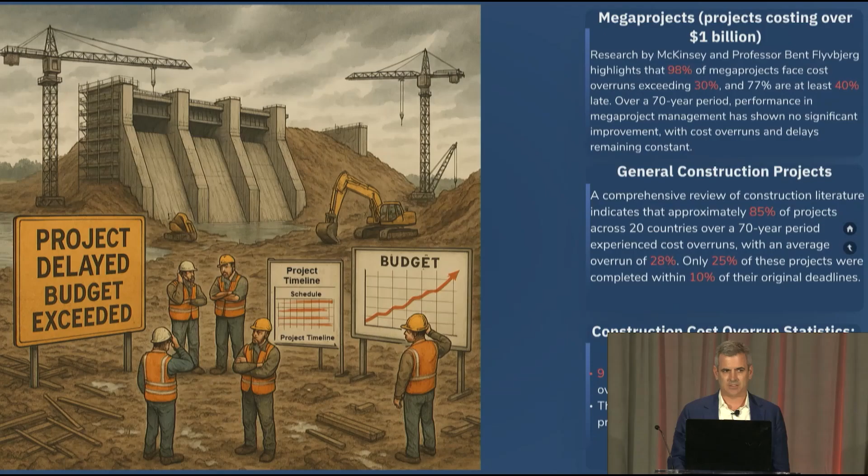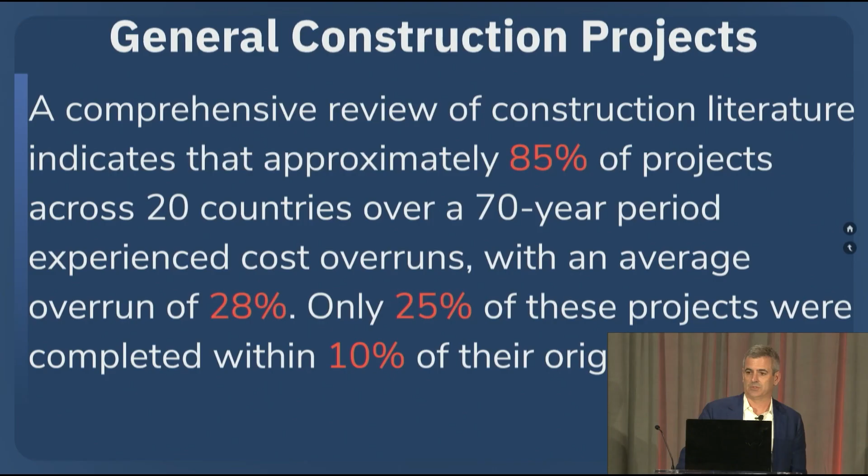So we have a major problem, probably not just in the United States, but the world, and that is our construction, engineering and construction projects are going way over budget, and they're taking way too long to build. The interesting part is the larger the project, the more it's going to cost, and the less you would like to go over in terms of percent, in terms of cost and time.

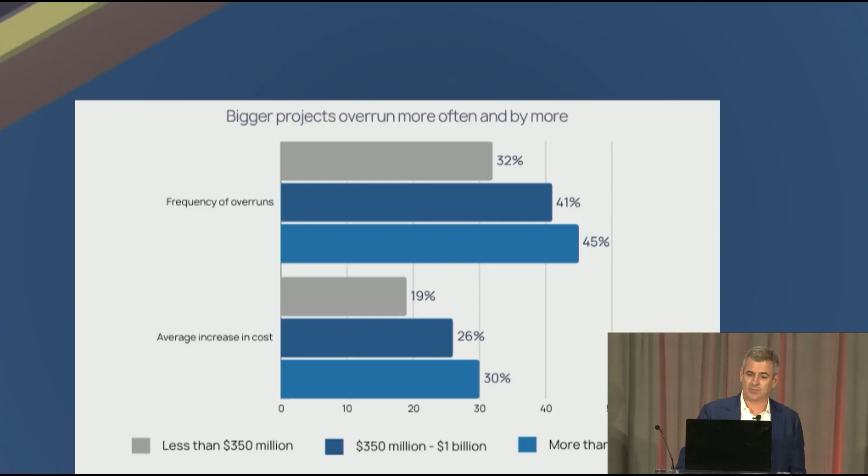But it turns out, and these are some of the key factors I'm showing you guys here, the bigger the program, when you get over $1 billion, the more percent we have in overruns, and the longer it takes. So you don't want to have a larger percentage on a $1 billion project, right? Because that's going to cost a lot.

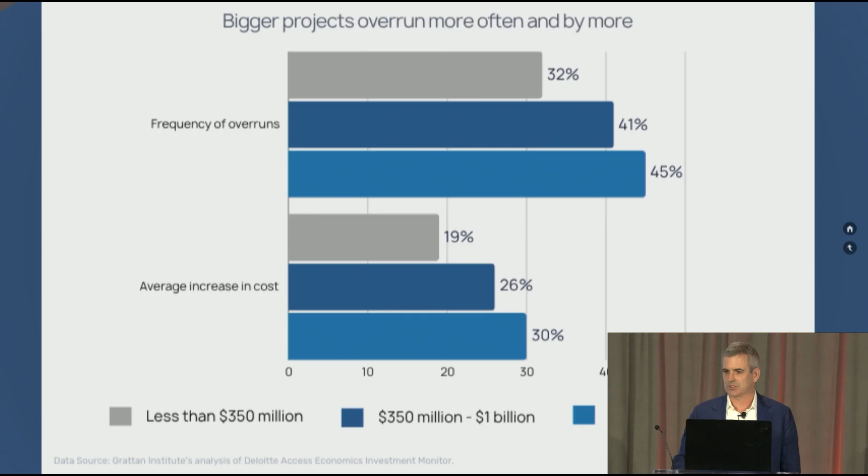So why is that? Why are we in a place in the industry where we're wasting so much money in engineering and construction? It's because these projects are so complex, and there's no chance of them getting any less complex than they are right now.

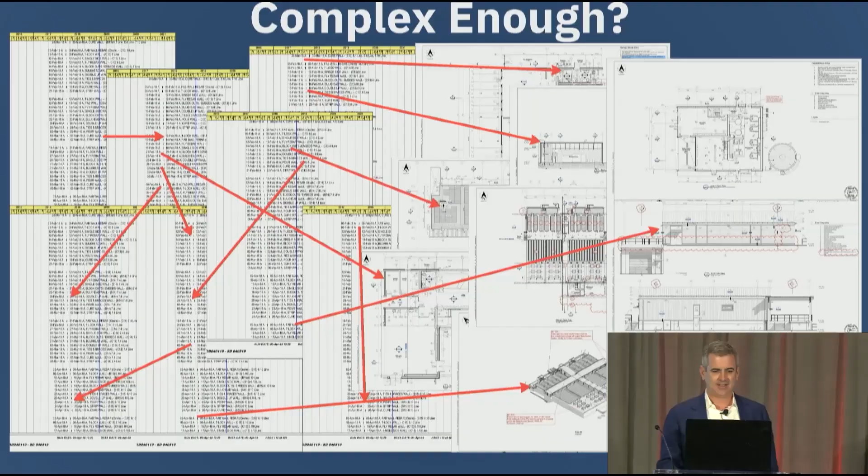And that's because what we're trying to do is connect all the dots between all of the planning of how we're going to build it, how much it's going to cost to build it, then we're trying to tie that into a 2D model. We're trying to say, have we forgotten any scope? Have we figured it all out? It's just too complex.

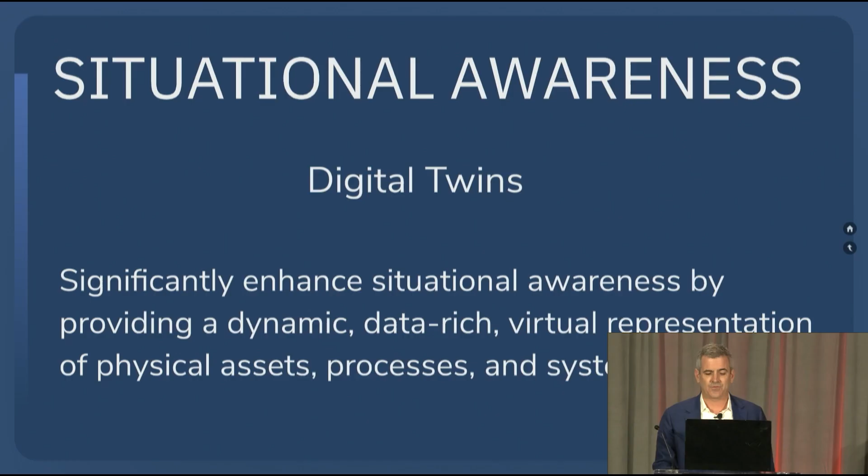So what we're lacking, and one of the key reasons we're failing in the industry, is we are lacking in situational awareness. On all the programs I've been on, it's never been the case that the people on the programs are not brilliant, because they are. They are the most brilliant people I've ever met. It's just they don't have the information at their hands to have proactive decision making. It's all reactive decision making.

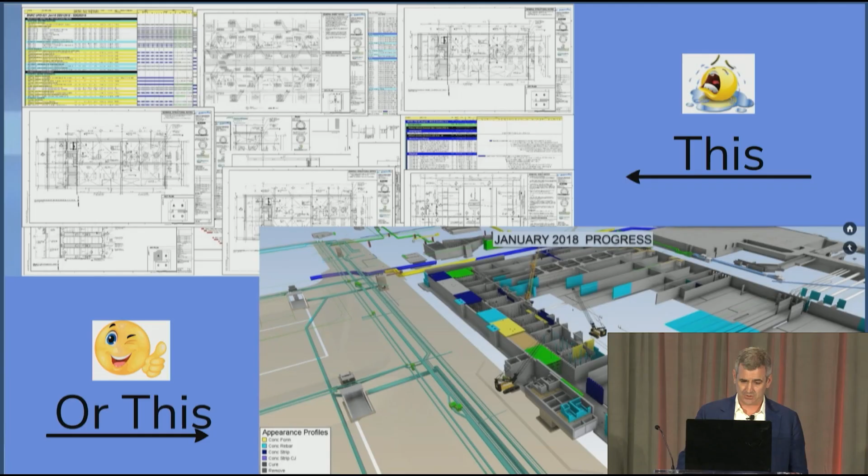So that's what it used to be. That's why I'm putting that very sad face there, because we're trying to blend it all together. But what we do now is we have our digital twin where everything is combined into visualizing it. And by doing that, that's when we start saving money and time.

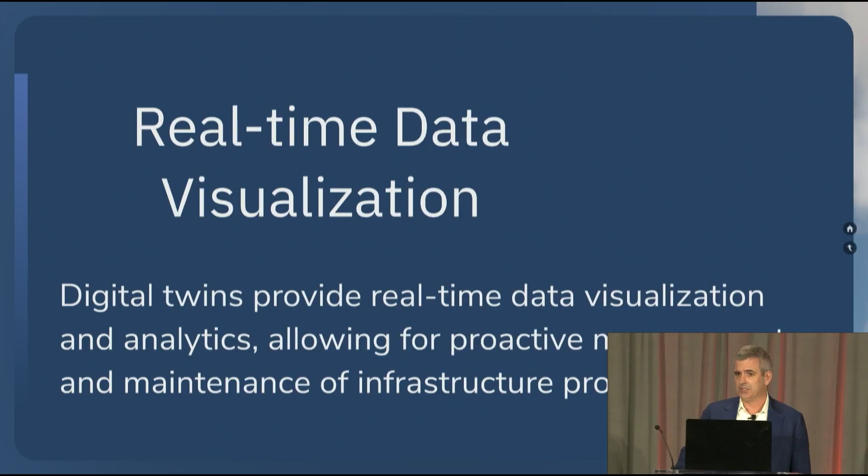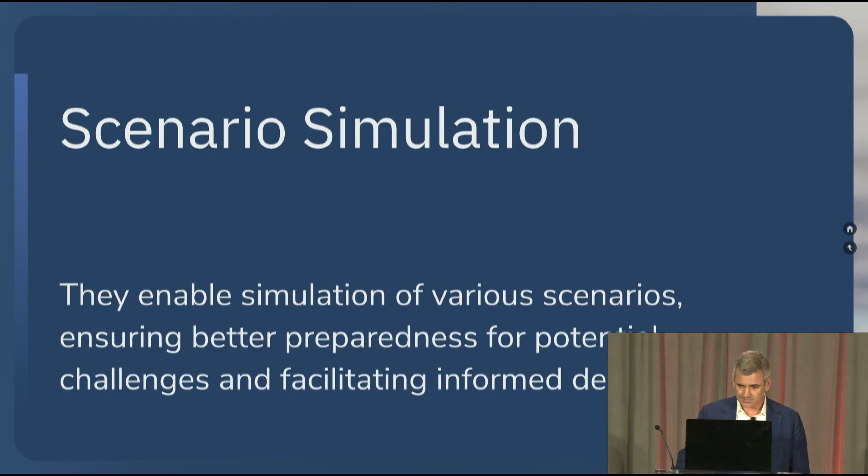So we're trying to get that data in real time so that we could start making decisions. We're trying to allow contractors to rehearse — digital rehearsals is what we call them. With their digital rehearsals, they can actually test it, practice before they play, before they go out in the field. And we're also enhancing the collaboration.

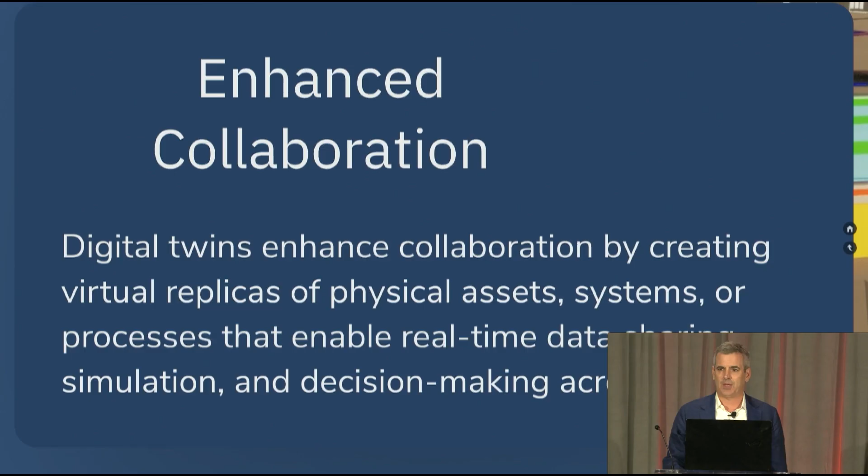Even on greenfield projects, I've found that they're incredibly complex. There's still people that we are impacting. There's still the community that we have to talk to. And everybody really needs to get on the same page so we know what we're building. And the programs we work on are billion-dollar programs, many billion-dollar programs.

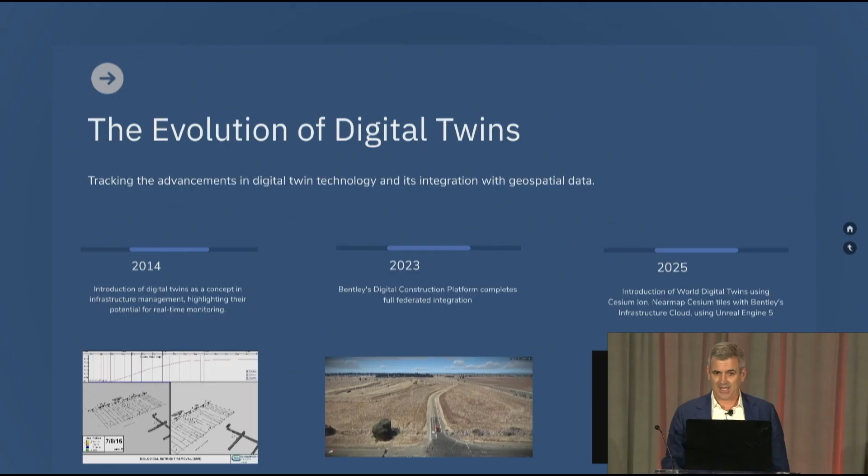So how did we get to the point where we are today, where I'm able to be here with you guys? Well, it starts with kind of like the Atari age, or Sega Genesis, if you will. Back in 2014, we had to prove this concept on a $2.1 billion program. And this is what it looked like.

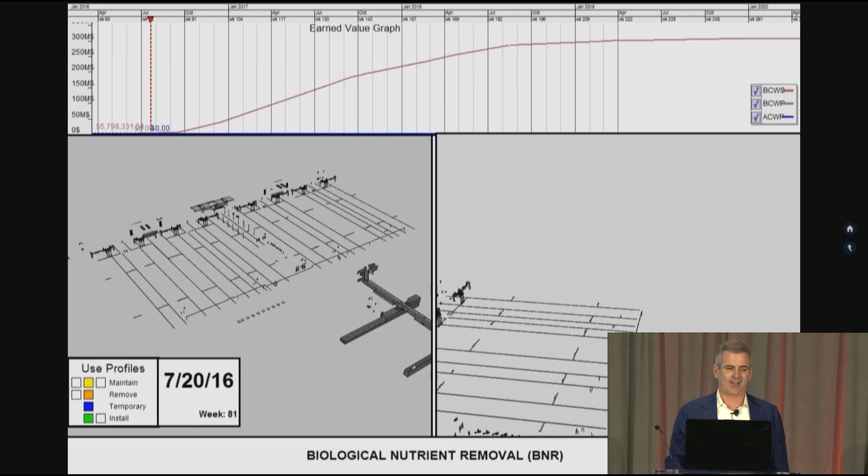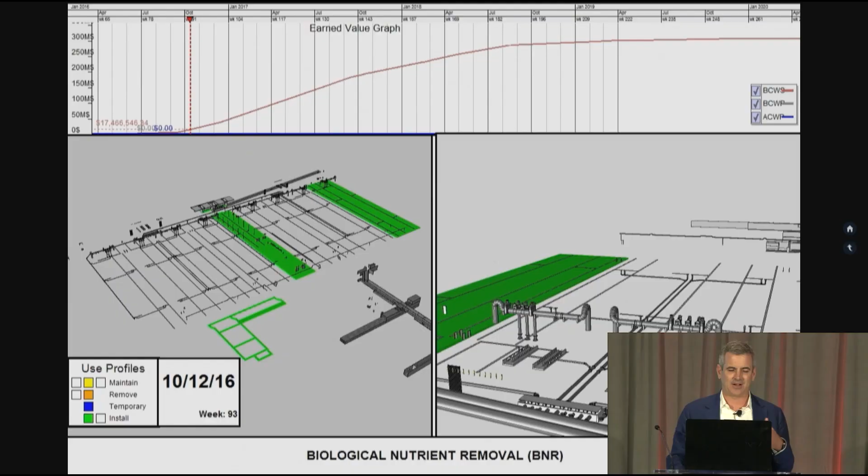So you can see here, it's beautiful. You have the cost up at the top. We're still able to do this in 2014. And you have what we are trying to build in different colors. That's to show the whole process.

And so we had to prove this to the team. We had one shot. We did this all on our own, we paid for it. And we had one opportunity in front of the client on this $2 billion project to see if it works or not. And this part where you can see I'm lining up with this gallery, we call this the Death Star run. You can see we're now doing the Death Star run.

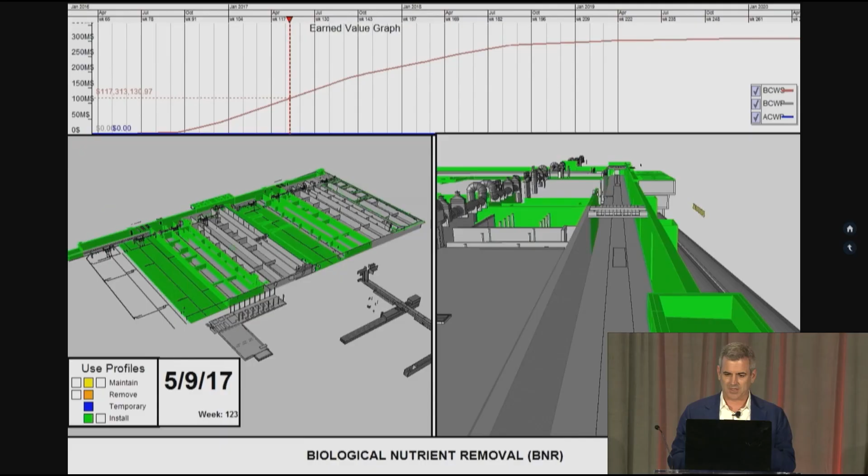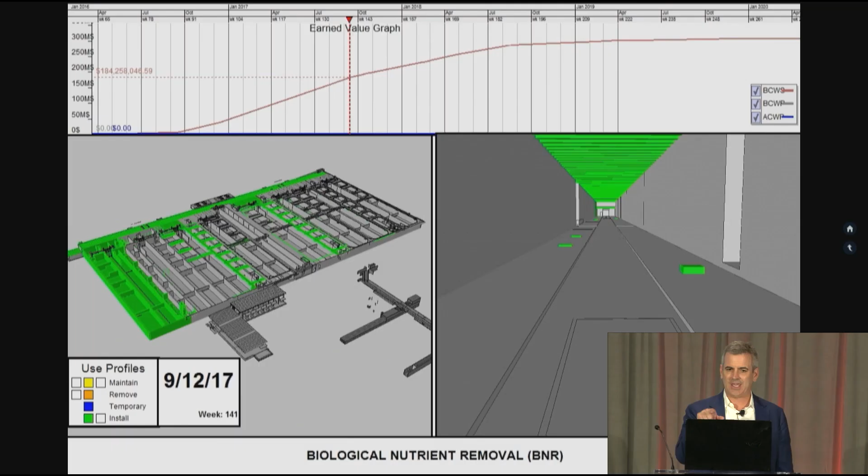It's just about 1970s graphics. And right when I got to this part and showed them, they said, oh, we can't build it that way. We need to talk to the designer. And sure enough, three years later, when the contractor got on board, his first RFI was, we can't put that lid on because we have all this equipment in the gallery. So we need to figure out if we're going to do a precast lid or put holes in it so you can see all the equipment in there. Thank God it worked, or else I wouldn't be here today.

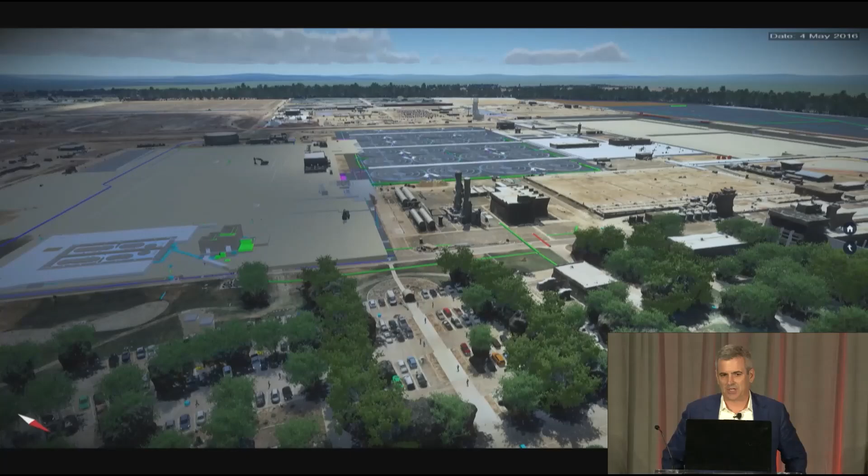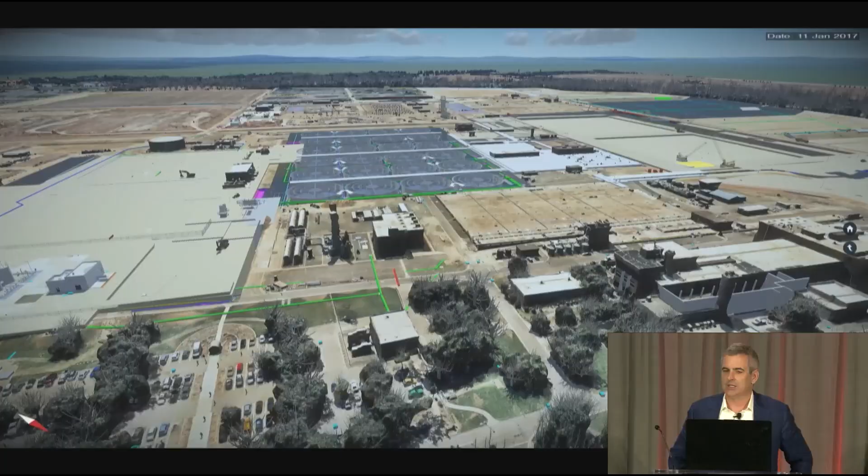So this is a digital twin of the entire site, both existing and new. On most of these projects, we did this ourselves, Project Controls Cube. We turned their 2D, 3D models into what we call 5D, which is the cost and the schedule. We overlaid it on the digital twin with geo-coordinates, developed during this process between 2014 and now.

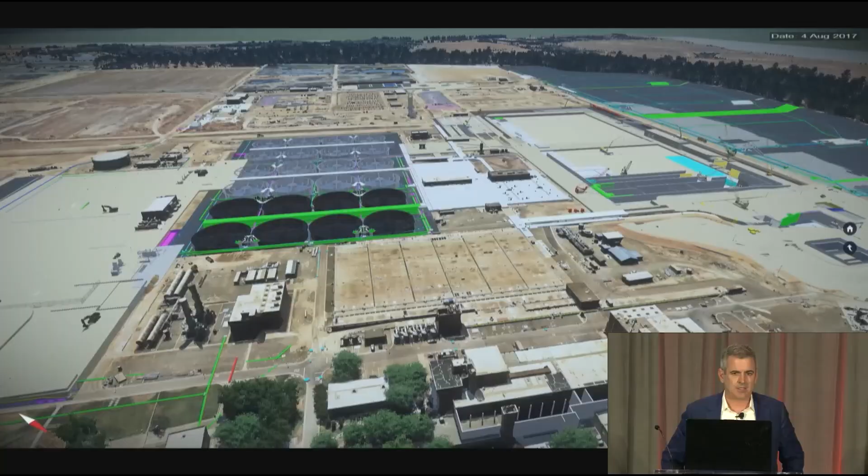We had so much situational awareness that the program manager said, I'm tired of us knowing more than the contractor. He said, I want to require the contractor to do this themselves. We had never done that before. So we said, okay, if that's what you want, we'll make it happen.

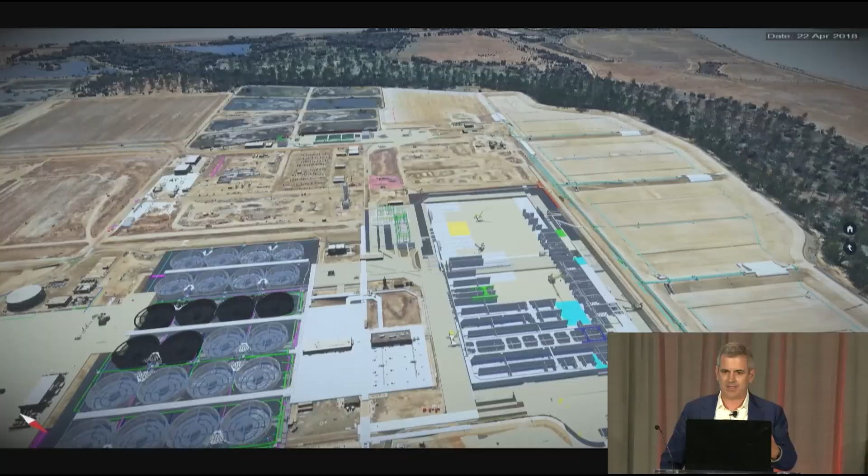That's really where it comes down to our partnership with Bentley, because we just go to Bentley and say, here's what the client wants, can you help us do it? And they always help us every step of the way.

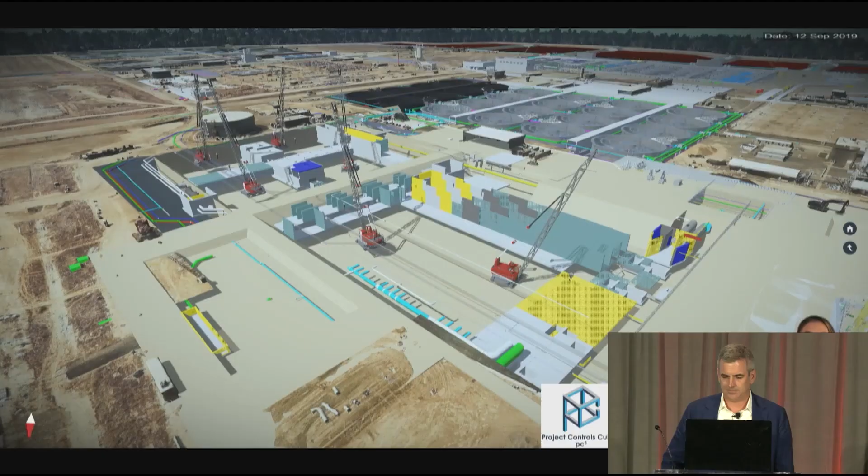We now require the contractor to tie their schedule activities to the 3D model, for them to do that in their baseline schedule, and then they review it before they submit it to us for review. I mean, we've come such a long way.

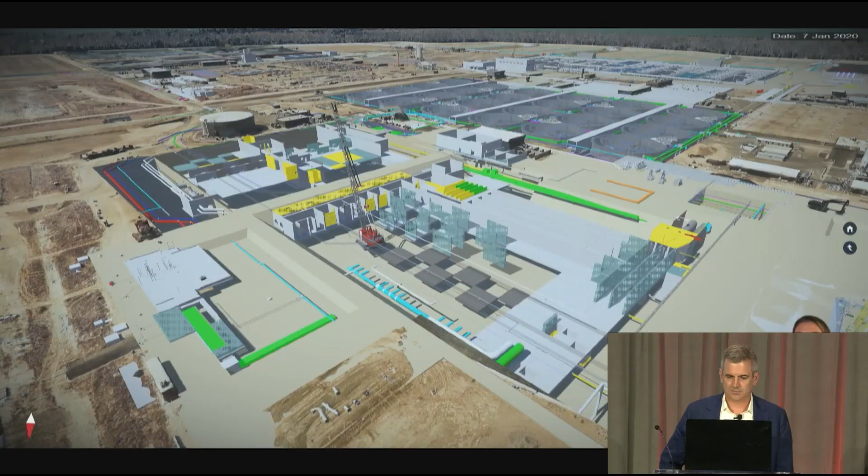Using Synchro, the contractor using Synchro really made our job as schedulers so much easier. It made reviews more efficient. I would say that because the contractor on TTF was using Synchro, they had the baseline approved in the least amount of time. It was the fastest baseline acceptance we had on the entire program. And it was the best plan. And it finished on time. There's something to be said about that.

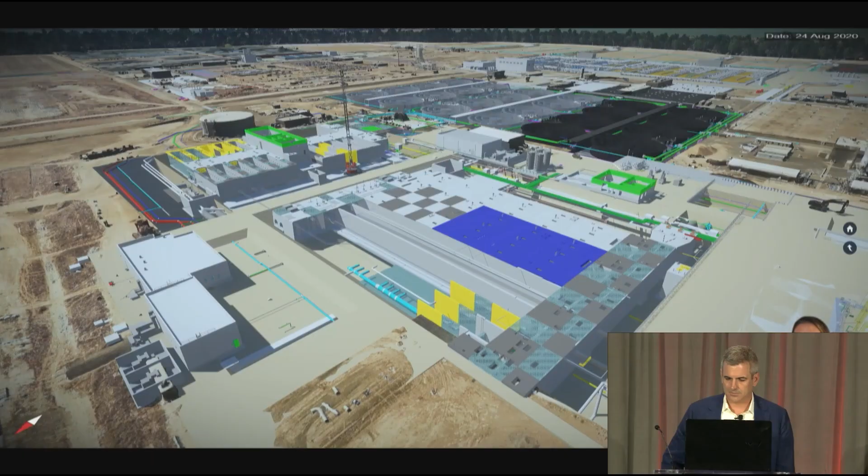Every month we would require them to submit a Synchro project with their monthly update, P6 schedule, and it was great because they saw the problems before they even gave it to us. I wish all contractors did that. It would make our job significantly easier. It was a great way to end this program.

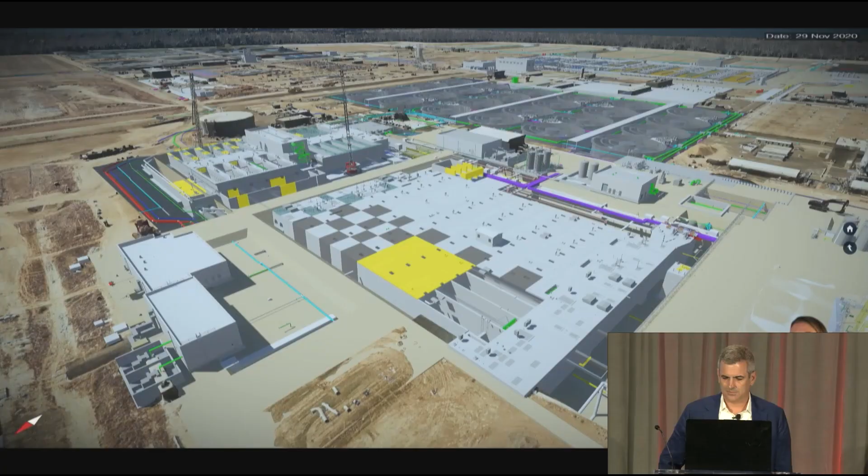On such a successful note, when you can own that and visually see it, we found that the TTF contractor was probably the first out of all 22 contractors on site to actually use the schedule that was developed.

So you can see when we integrate a digital twin into construction, the situational awareness is at its peak for the technology that we had at the time, in 2020.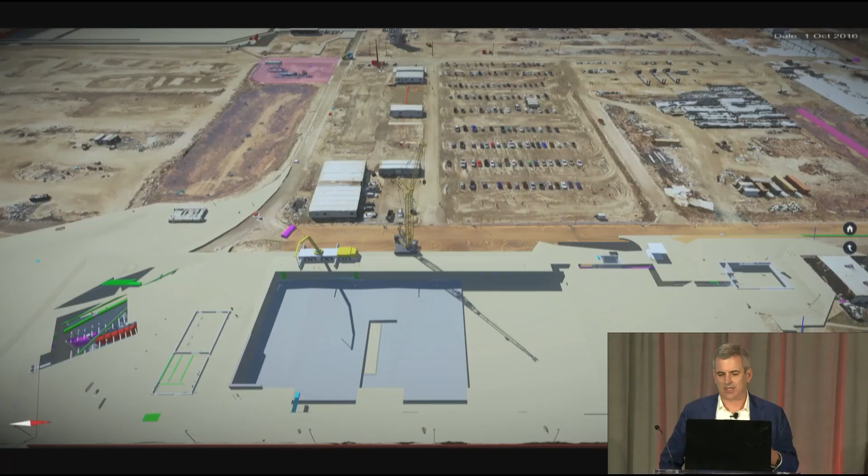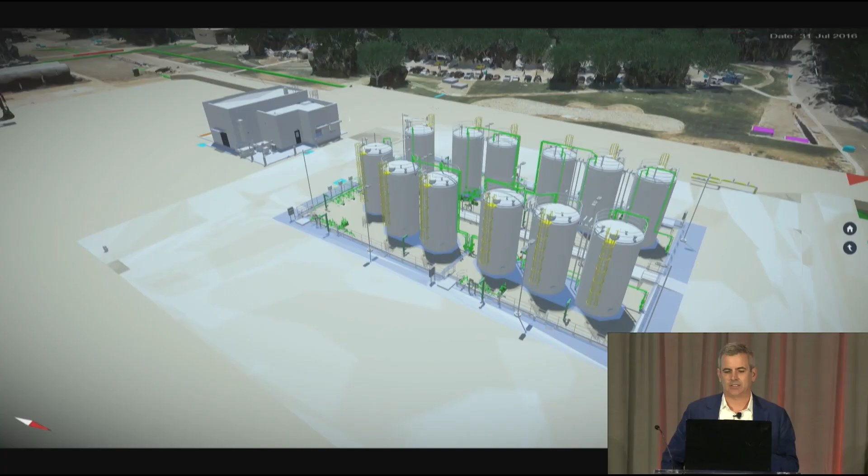The result of this is we finished $400 million under budget, and we met all of our compliance deadlines. And that is because we let the brilliant people who run these programs have proactive decision making. The result of that is, like I said, $400 million.

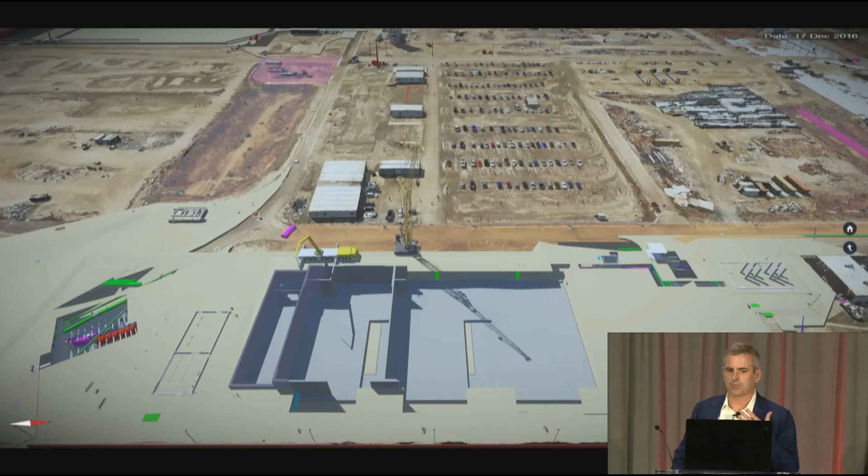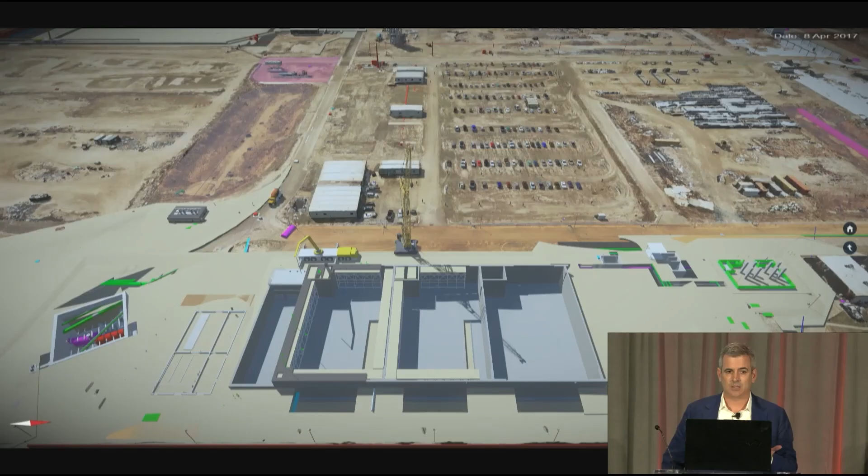So what we did was turn around and make another program called the Harvest Water Project, in California. We're taking all the clean water we created with this tertiary treatment wastewater facility, and pumping that recycled water into the Central Valley, where we get all of our fruits, vegetables, you name it, that supplies the country, and we're raising the water table 35 feet. The groundwater is going to be raised 35 feet, and that's going to cost them no extra money because we use digital twins.

So does it work? It absolutely works. So where are we today? Well, today we are taking all that we've learned in the past and integrating that into Unreal Engine and into this project. This is called the Bull Run Filtration Program. This is the next generation of the digital twin. What you're looking at now is world digital twins.

The last one was 20 miles. This could be all of your projects all over the world, all combined. And you think that takes a lot of horsepower? It used to.

Now you can see, we can see our entire projects from space, and I'm going to zoom into it, but you could literally travel anywhere around the world and see all of your projects, geo-referenced, geo-located exactly where they're supposed to be. Every single yard pipe, every single utility, every single building.

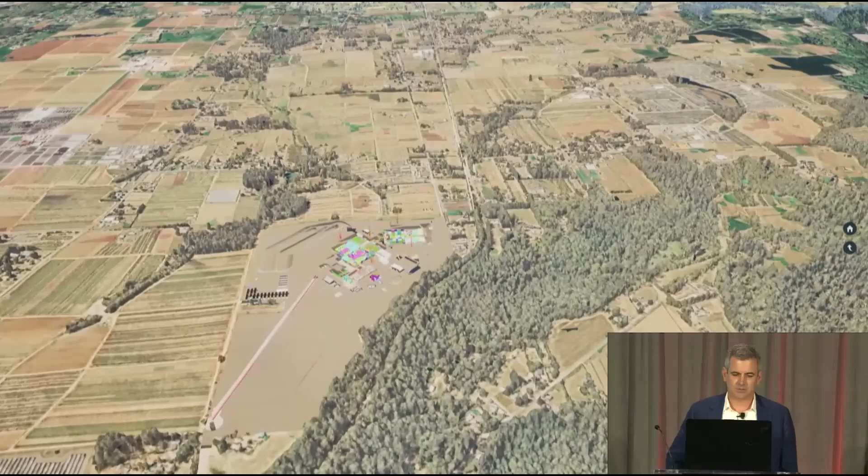So you can see everything is referenced into the site. This is called the Bull Run Project. It's miles and miles long. What we're able to do is tell stories now.

We can tell stories to the community about how we're building these mega projects. This is Mount Hood, where the people of Portland receive their clean water from the watershed of Mount Hood down to the Bull Run watershed. So what we're able to do is visually, without even having to talk about it, tell the story of how we are enhancing the lives of the people of Portland, making sure they're safe, and doing it in a way that the community is involved.

So we can show them exactly where their water is coming from, all connected to the digital twin, all live.

This is the reservoir where we keep all of our water before we treat it in our water treatment plant. Right now it's still in construction.

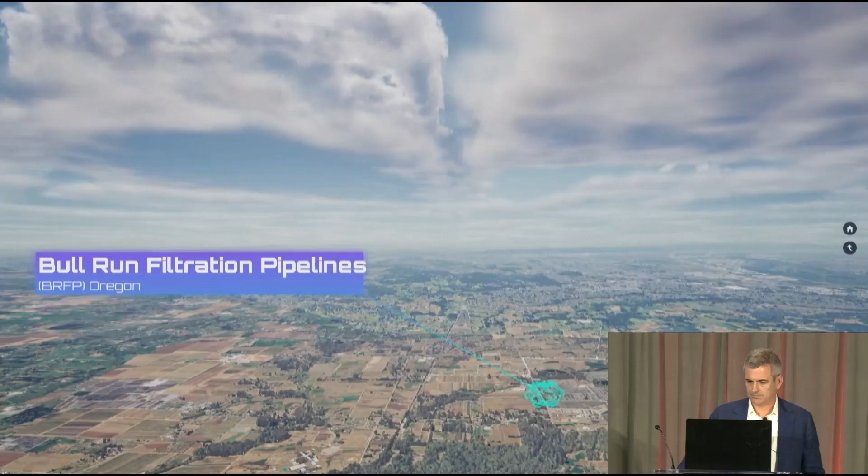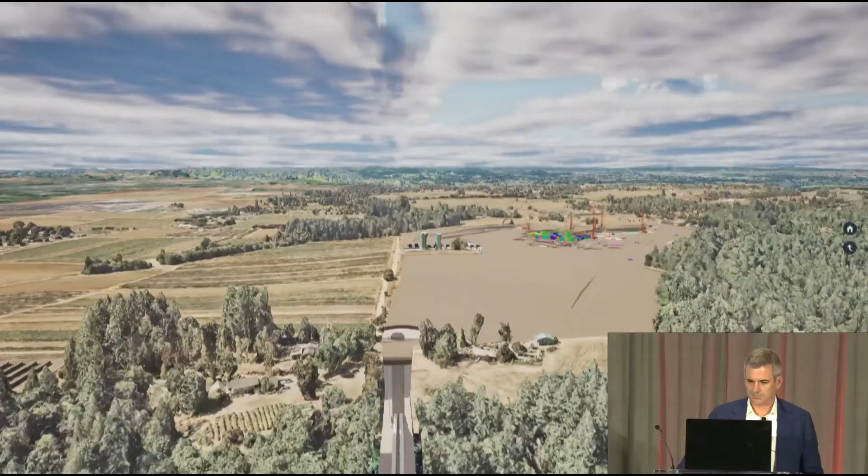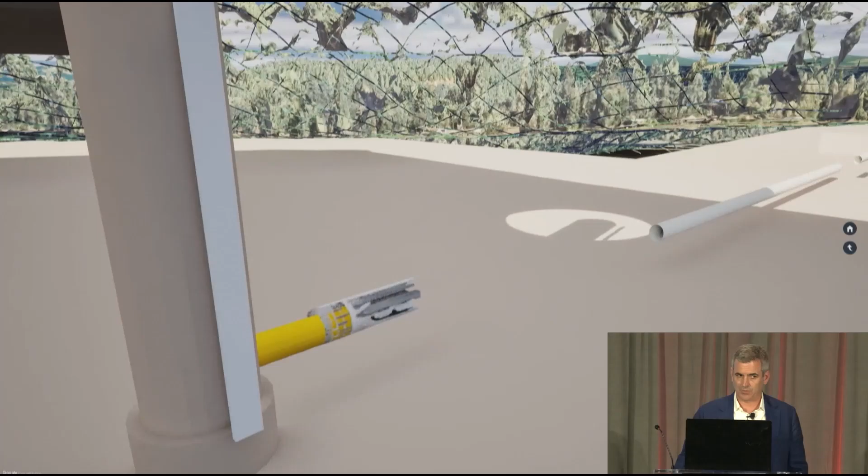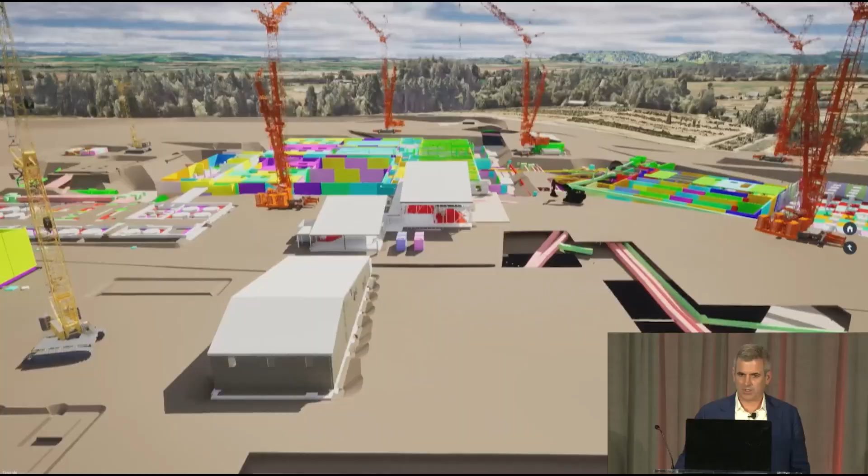Every element of the construction project is in here, so this is a very intelligent model. We currently do not have the capabilities to harness all of that intelligence. I believe, hopefully, the incredible people in this room will be the ones that develop that. It's ripe for AI. All the information is in there, every single cubic yard, every single linear foot, the cost of everything, the duration, how much, the location, the geo-referencing, you name it. It's all embedded in what you're seeing right now.

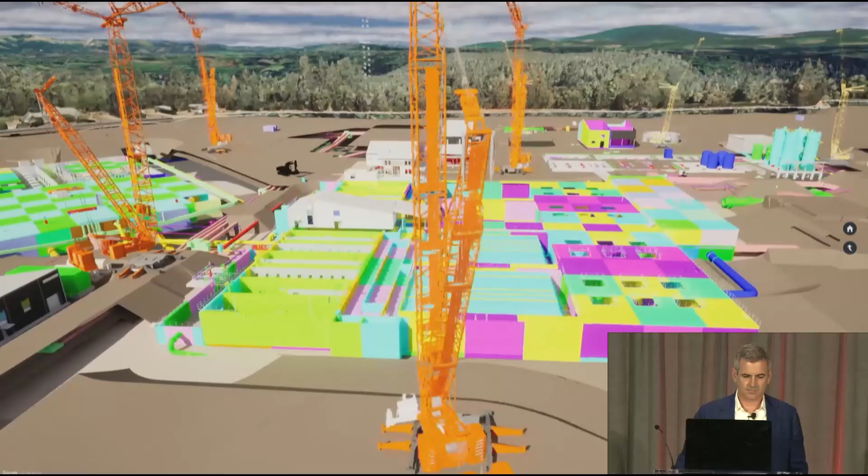Each of these cranes represents the exact location of where they are. So you can imagine if you are a contractor who actually built this, they've been rehearsing this for over a year. They've changed their plans so many times because they found that they can improve it over and over again.

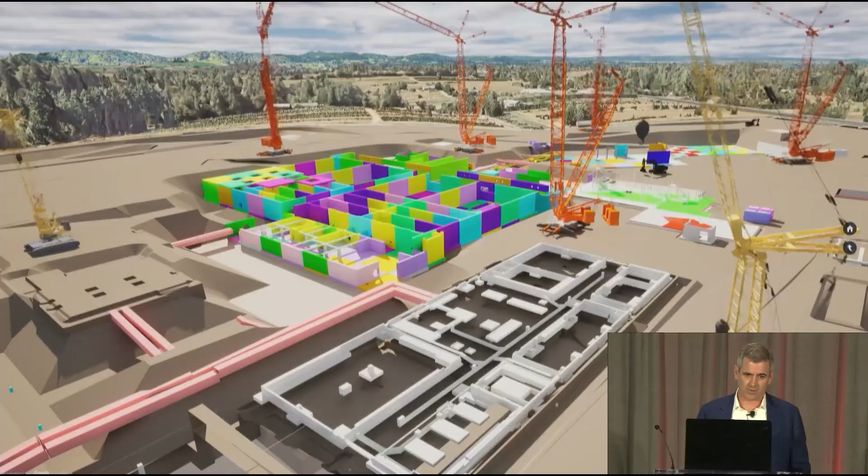What do we do in construction today? We don't even plan before we go out in the field for the first time. We just put it together, go out, and we see what happens. But now we can see everything that's underground. We could practice how we're going to build everything. And then we can work with the community to make sure that we have no disruptions, which always happens.

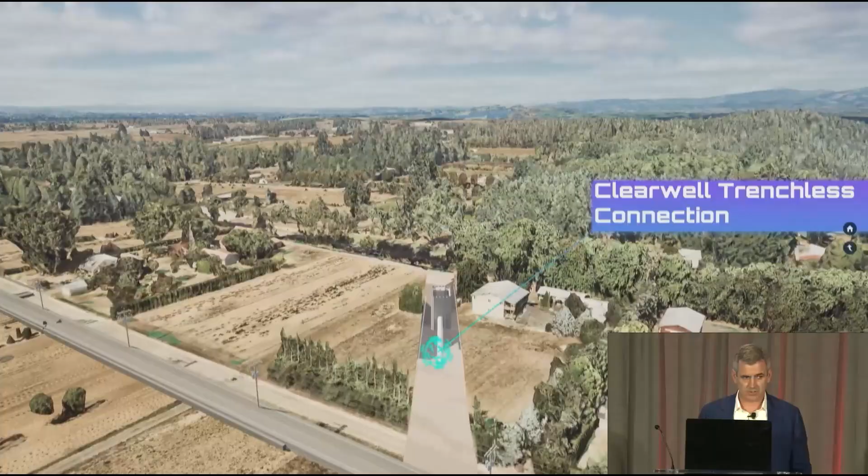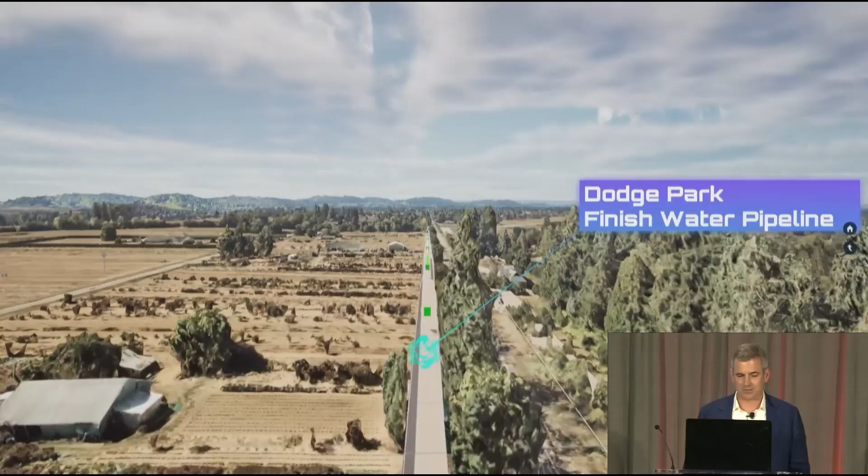So it's not just the construction site. It can be miles and miles of piping. Think of a project that has hundreds of miles. Maybe it's a new gas line, maybe it's a new oil line. All of that is now capable.

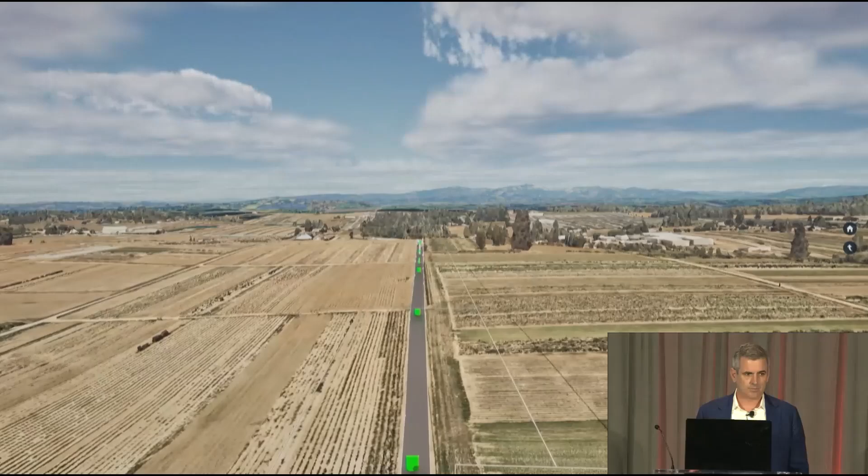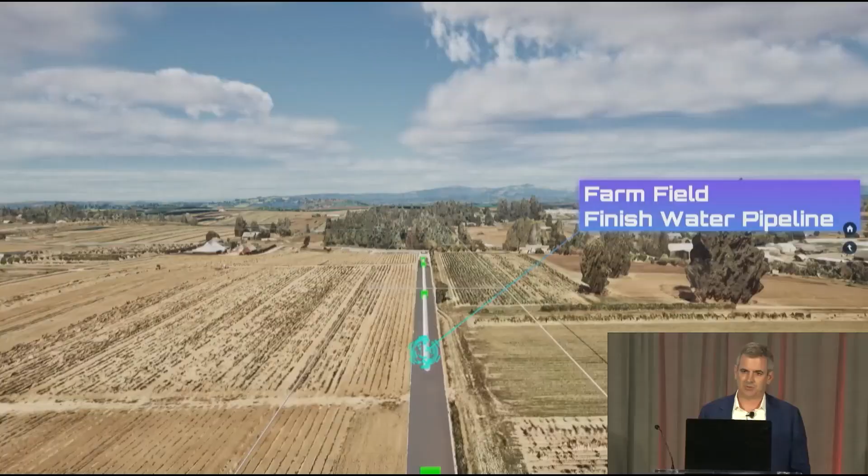You have the capability to do that on any project of any size, anywhere in the world, all geo-referenced all together. And it's not so big that it cannot run. It does require some power, but not as much as you would think. And I think that's the result of these Cesium tiles working in Unreal.

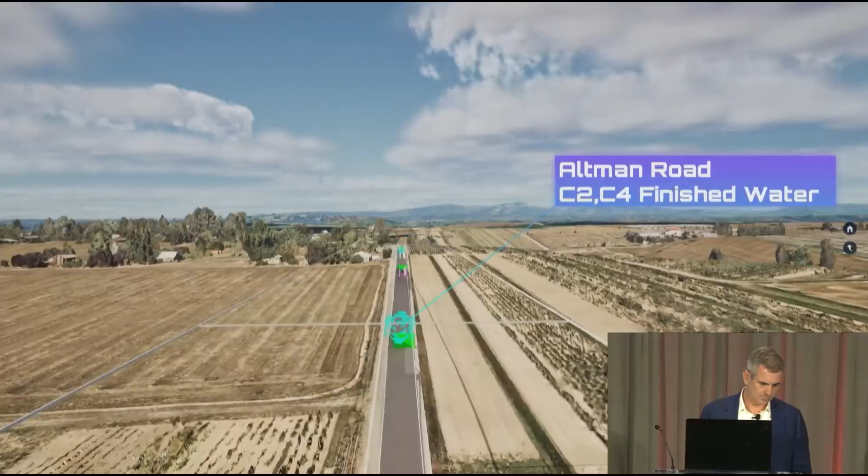And this part is where we actually cut into the existing water supply of Portland. Everything that you see here in the pipelines has windows of work, and all of that is sequenced in and visualized, so we make sure that we never violate any of the rules that have been provided to us by the city, the county, and the state of Oregon.

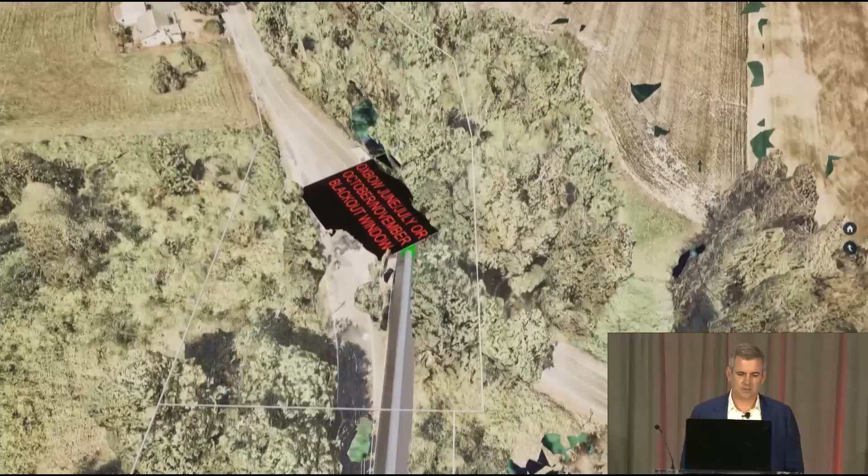So for example here, you can see that the writing here tells us when we can actually cut over, these windows, so that we can visually see, because these programs are so complex, if we violate or not. And then you can see that that's where it disappeared. So that's really where we are today with the digital twin.

And what we're doing is we're taking the iTwin, where it has all of that intelligent information. Bentley's infrastructure cloud is where we take that into Unreal. NearMap is the real detailed Cesium tiles that you see there, overlaid on Cesium ion. Now, what does that look like when you actually see it?

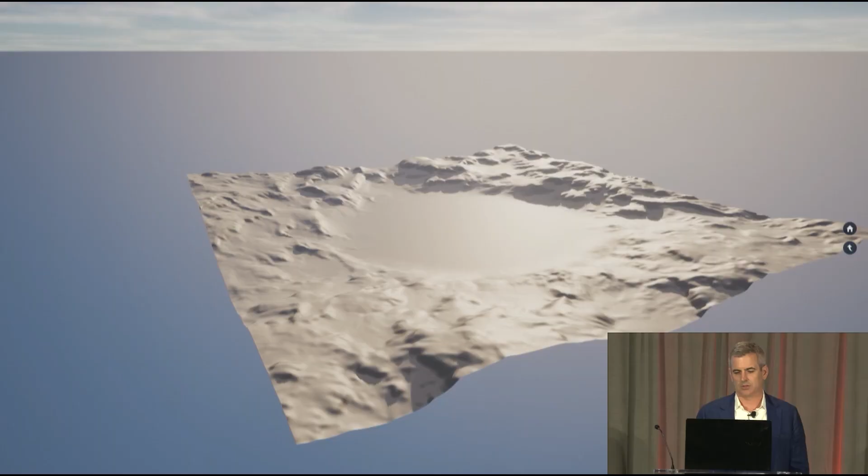So in Unreal, this is what you get. It's kind of intimidating for me, so I'm not as smart as you guys. So what we do is we basically fuse in all of our intelligent model that has all the information with the cost, linear feet, schedule, you name it, everything. So this is a direct representation of that.

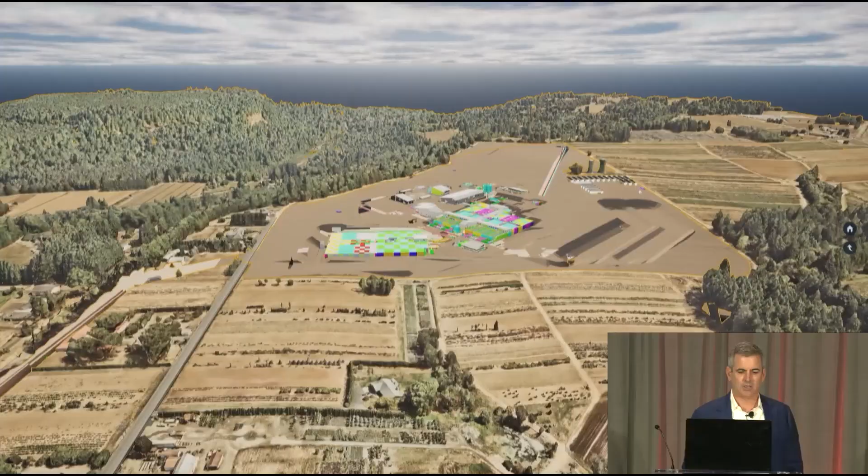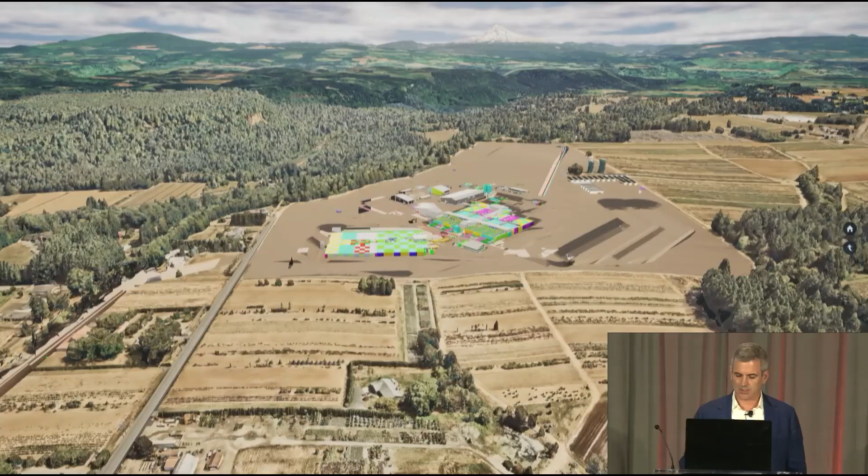Geo-referenced, everything's geo-referenced, and then we take that and we overlay the NearMap Cesium tiles on top of it. Before we had to do this one by one, but you could do hundreds of miles. And then we overlay the Cesium ion on top of that. And then you have what basically is, in today's world, a real world, endless distance digital twin, live digital twin.

And that is the end of what I want to show you guys today. Sorry I ran out of